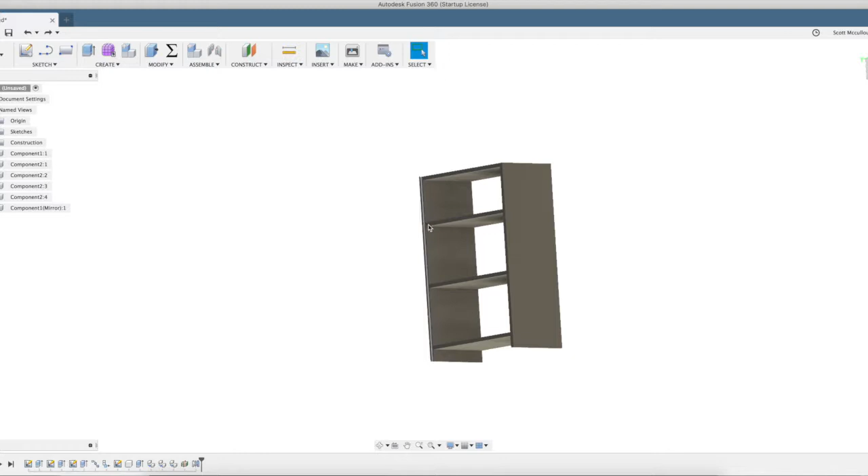Today we're going back to the bookshelf we worked on yesterday. We're going to clean up the shelf spacing that wasn't very good, start adding trim to the outside, put a face frame on it, some base molding, and probably add a top as well. So let's get into it.

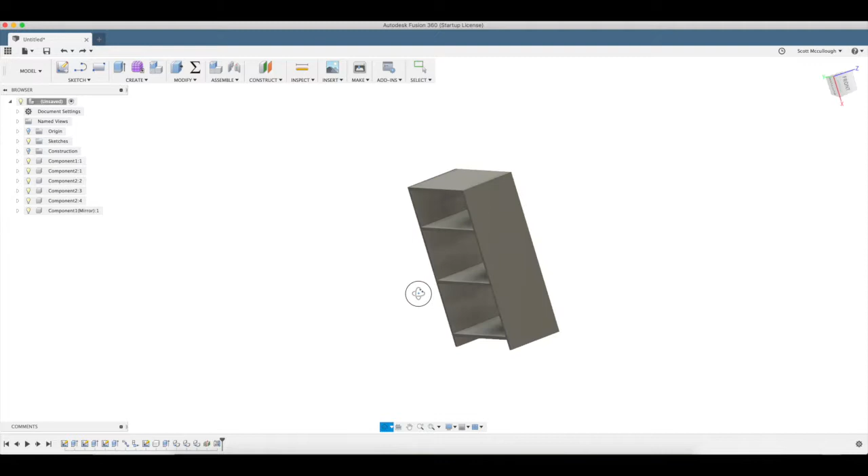Let's fix that mistake we saw yesterday with the spacing, and we could probably use an extra shelf in there. A quick feature I haven't discussed yet is the measure tool. Hit I, you can select that - see, it's black there. Come up to here and it gives us dimensions so we can see where we're at. Escape. So that's 11 1/4.

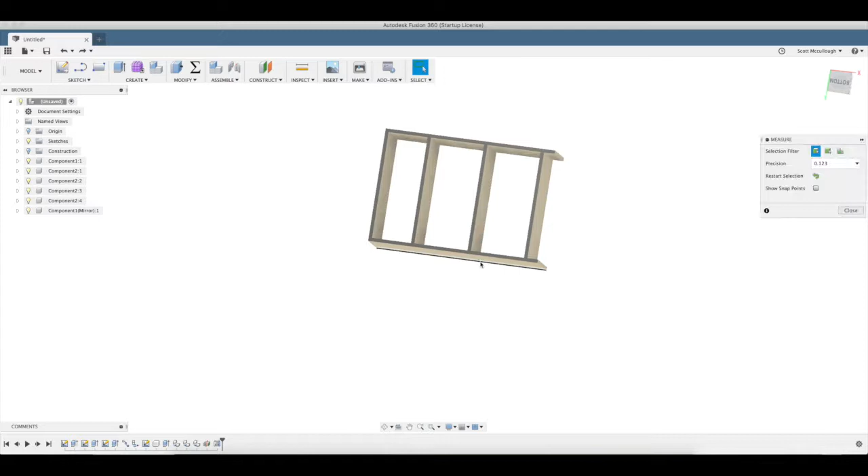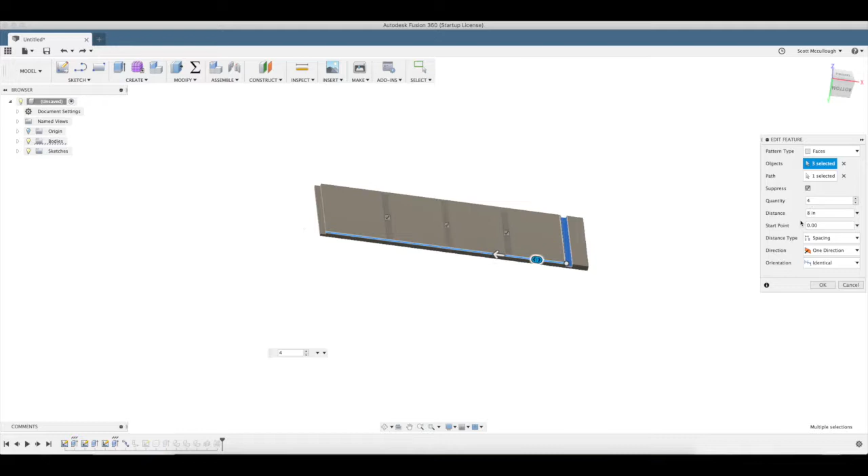Let's get where we can see it in view here. I think I want to add a whole other shelf to this, so let's make that 4. Change our spacing to probably about 8.5 - that looked about right from our math there. 8.5 inches, hit OK on that, and now you can see we've created an extra shelf, but our shelves are out of line.

We're going to fix that as well by using a new tool I haven't talked about either - the joint feature, up here in Assemble. Let's click on Joint. We want a rigid joint, and we want to select component 1.

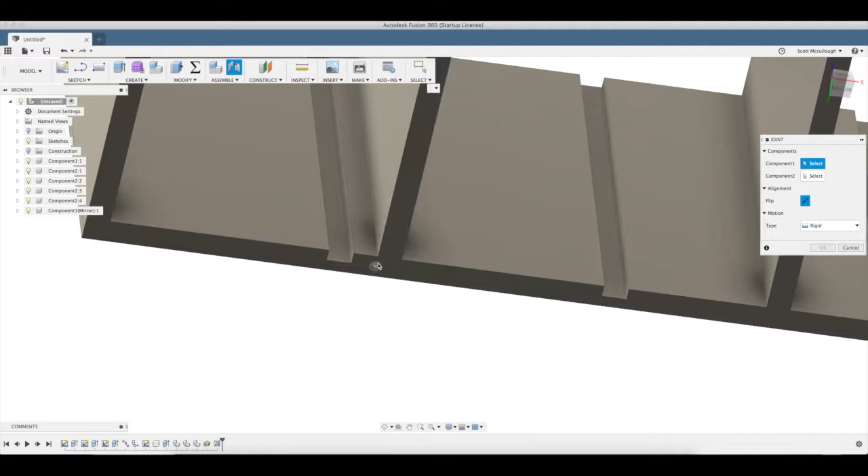This is kind of like the move tool we used yesterday. We want to get that corner there, come to that corner. We can see there's a little animation there, and when you see that shaking like that, it means it's locked in. So hit OK on that.

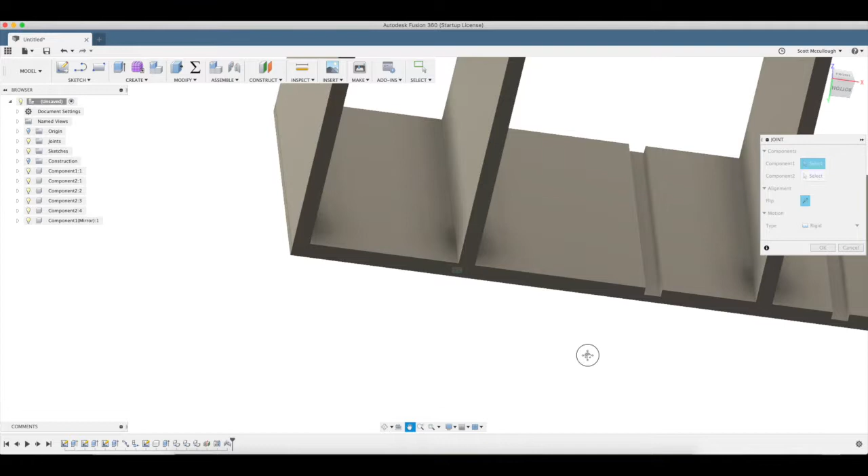Alright, I want to come back - not that, Assemble Joint. We can see there was a hotkey, J, to bring up joint. We'll use that on the next one here. Get that corner there, locked in.

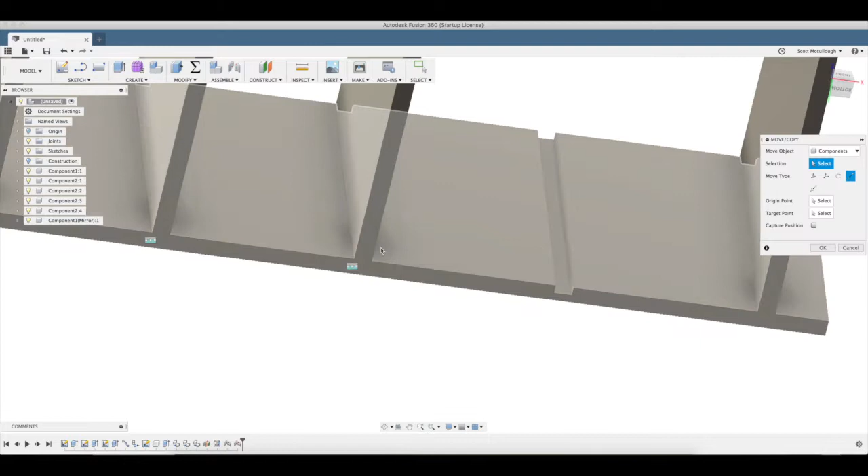Okay, now what we need to do is copy one of these to get back to the state from yesterday. So for selection, we're going to select this, our origin point, and I want point to point on the new selection here. So point to that point, and we want to create a copy. Okay, bring back up our J tool for our joint, rigid joint, component 1.

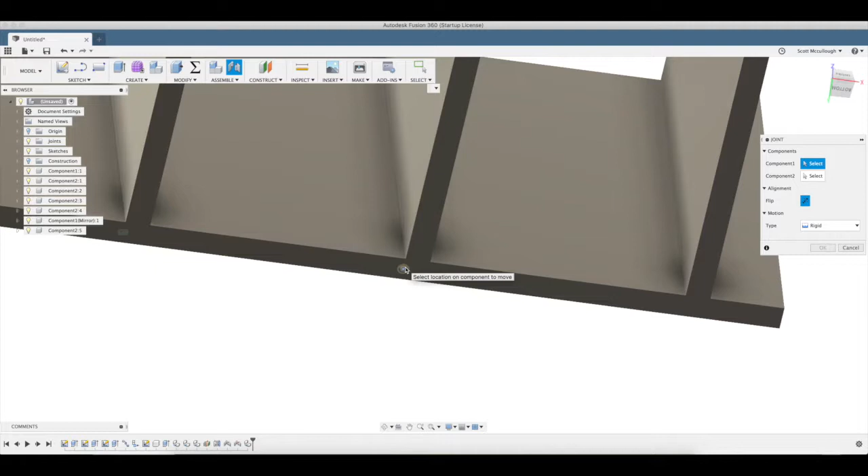I'm not sure how it's going to work since it's already got on top of it here. Yeah, see, that worked really well. So what we need to do is move that up and out of the way so we can get a better selection on it. We'll cancel that. M for move, free move. I just want to use the up arrow here to get that up out of the way.

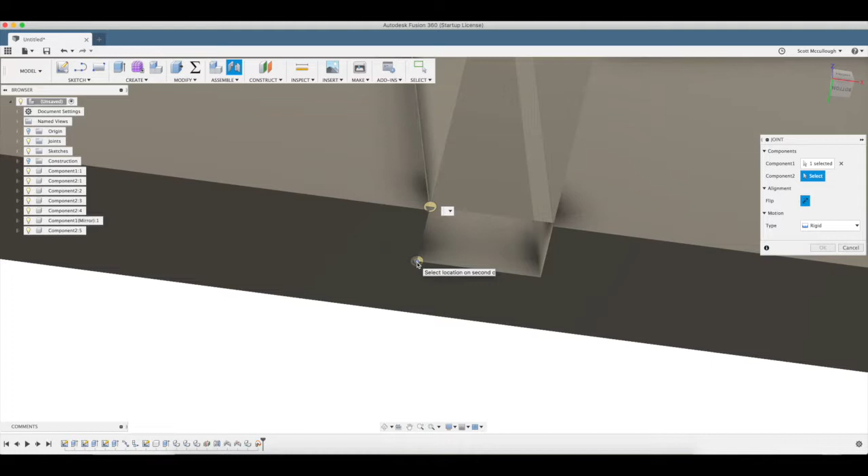Okay, J for joint, capture position. Select that point. One thing I noticed is that circle there is with the surface, so make it flip over inward, where this is in the same plane as the one above. Lock that in, okay on that. One more to do.

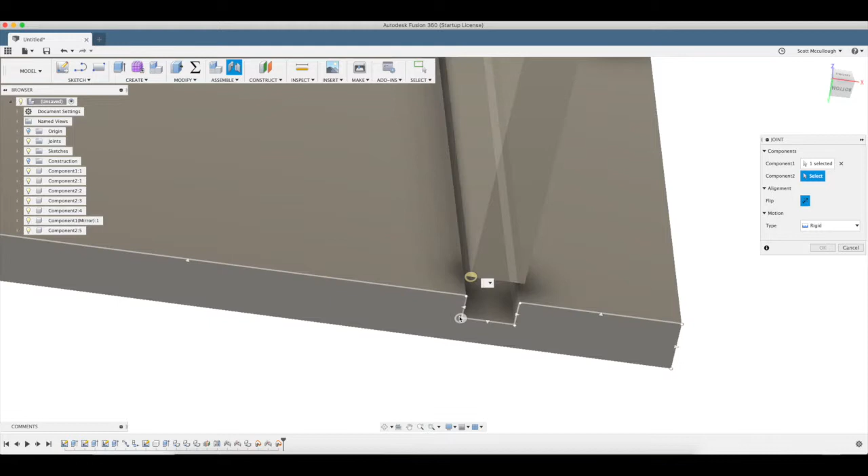These joints are very powerful in Fusion - I'm going to show you why here in a second. Do the same thing we did last time, get this up out of the way. We're still on free move, we can see over there in the selection window. Just get this up out of the way. Okay, J, capture position, select our point 1 here and second point. Locked in, okay. Yeah, I think I need to get the top as well, yes.

J for - M for move first, just move that out of the way. Enter, J tool, capture position. Alright, we're all locked in.

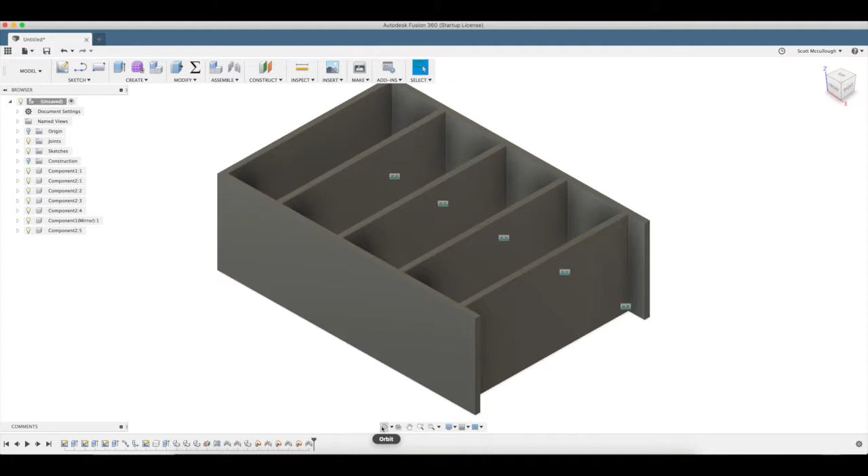So like I was saying, let's show you why that joint's really powerful now that we created it. What we can do now is, see, I hit the home button here. I think yesterday I just noticed we didn't really draw on the right view, which isn't a big deal. We can get this, put this as top, and then the down arrow, hit reset front.

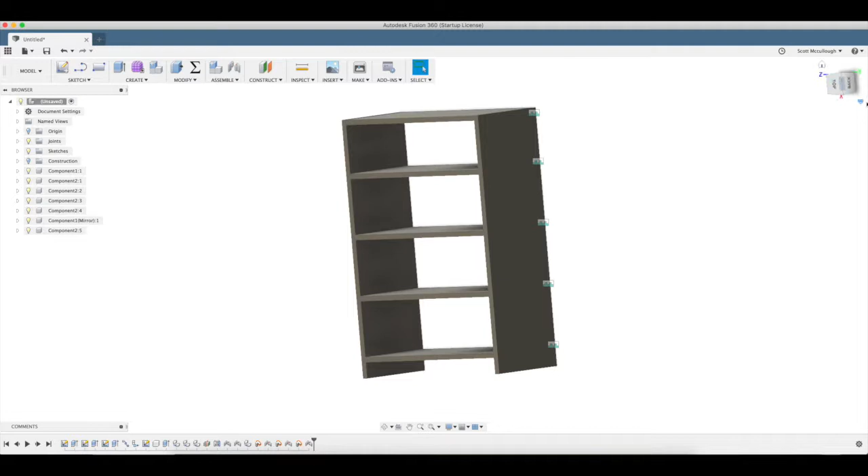So we want to create a new parameter, and we're going to call that one face frame width, and we're going to make it, I think, 1.5 inches - well, 2 inches. 2 inches.

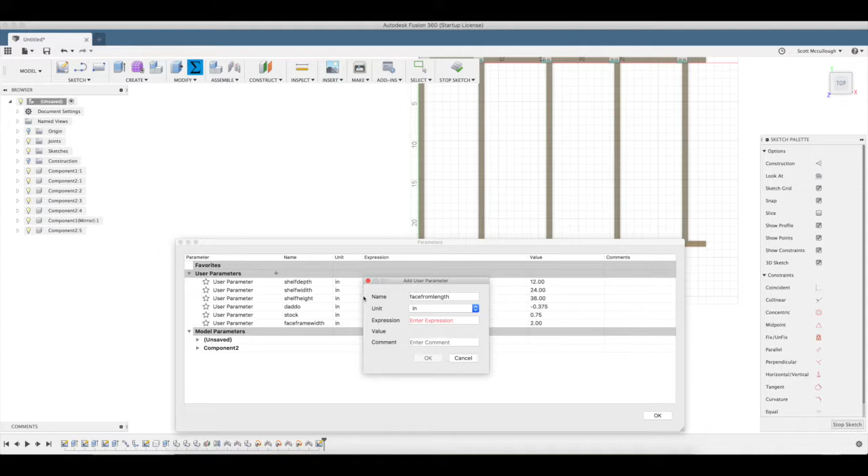And then we'll add one more parameter, face frame length. 33 inches.

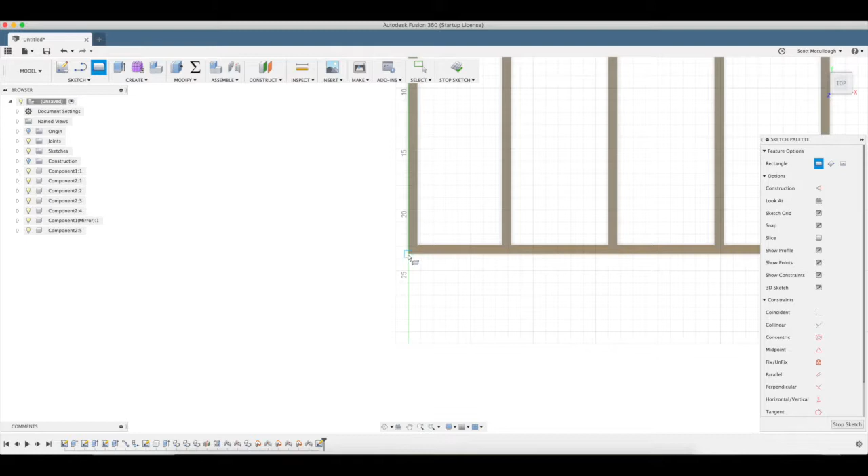Okay on that. Now we can still have our sketch up here, so we'll just draw a rectangle. Make sure I got that corner selected there first. So we'll say face frame width, and tab over, face frame length.

I think we're going to go ahead and change that from 2 inches to 1.5 inches - I think it might look a little better. Yeah, it looks a little better.

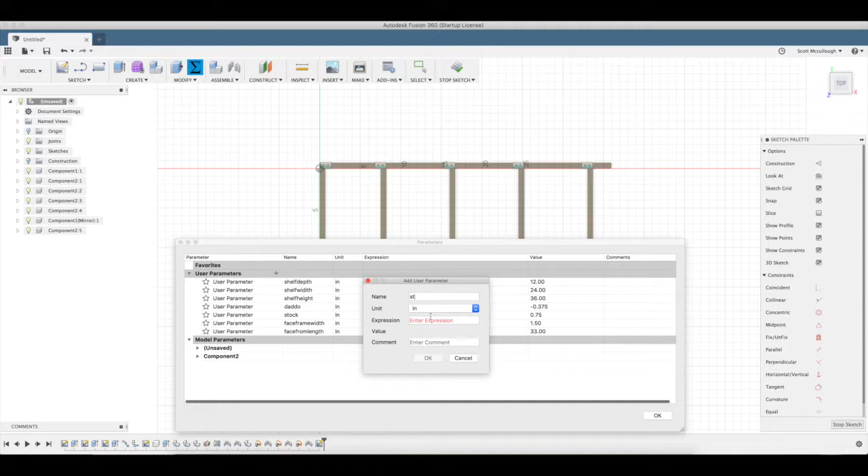Now I was going to keep the same parameter, the 3/4 stock we used yesterday, but there could be a reason why you might want different stock thicknesses, since these are kind of two different assemblies. So we're going to call this face stock - I know my naming isn't very clear or organized, but whatever works for you. We'll just say 0.75, because it doesn't matter as long as we use the right parameter.

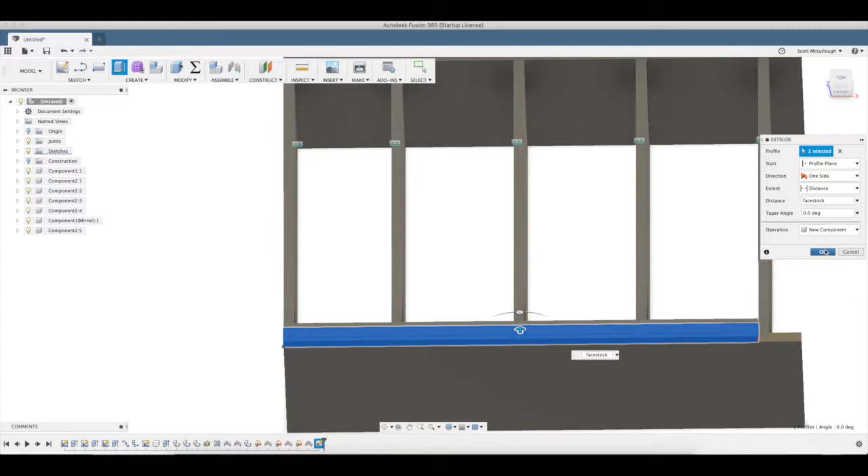So we're going to hit Q for press pull. Select these two different ones, face stock, new component. And there we have that.

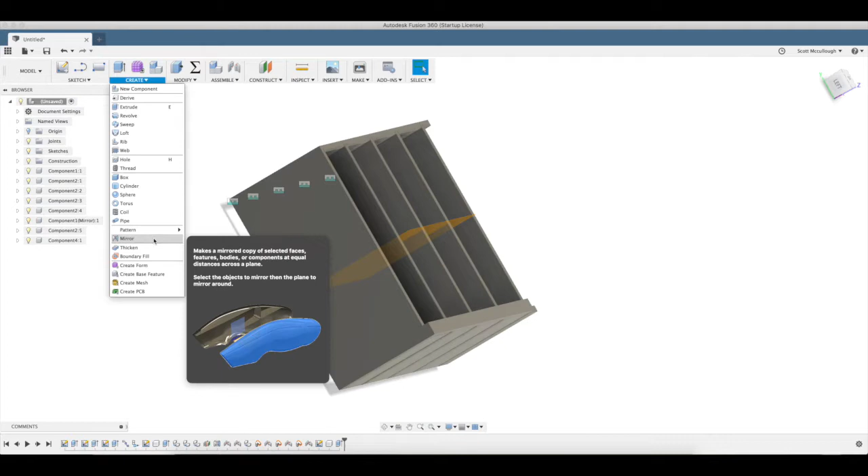Now what we can do is use that handy dandy mirror tool we used yesterday. I'll be able to use the same construction plane as yesterday, pretty sure—we'll see when we go to try to flip it. I had to remember what selections I used yesterday. Create mirror. Got component selected, object is this, our mirror plane is here. Yep, that worked just fine.

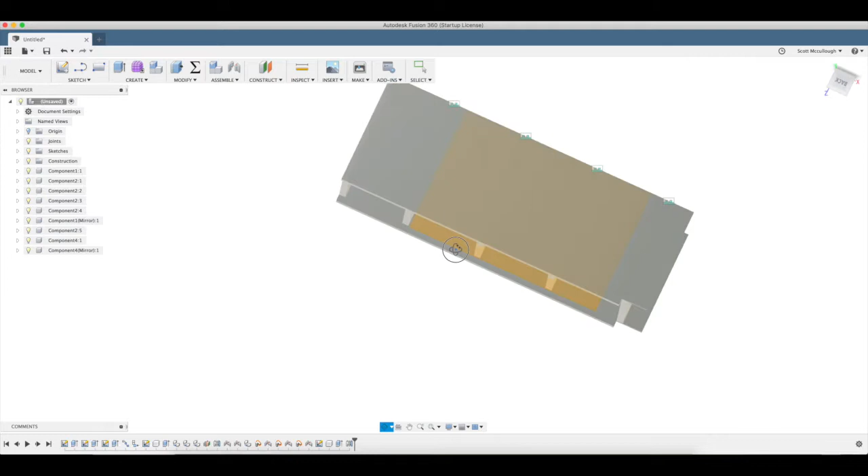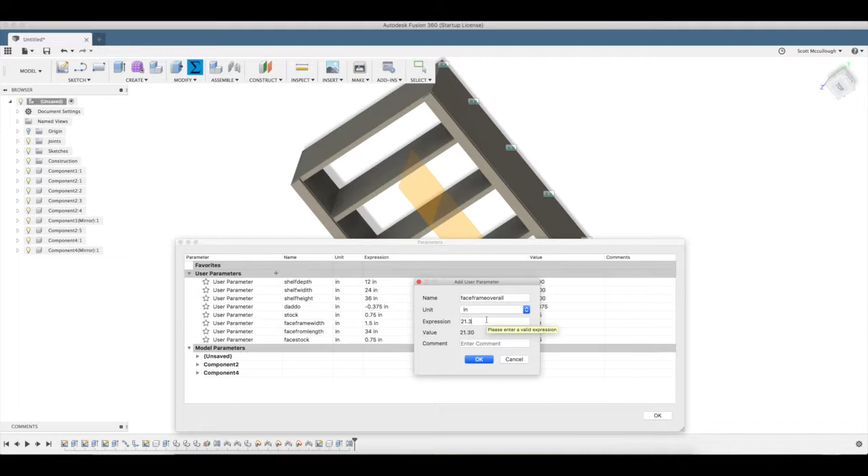So now let's add one more parameter: face frame overall. We'll say that was 21.375. Enter.

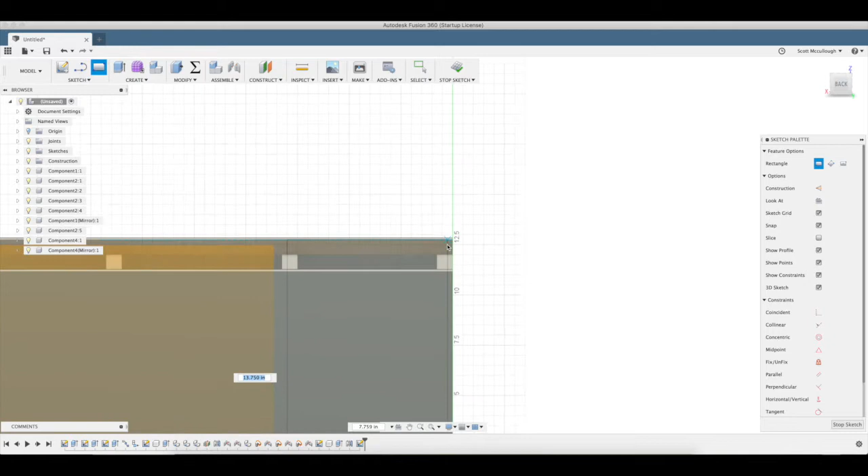We want to draw a sketch on that face. Kick that up so we can see what's going on in there. And we just want to select that corner. Where are you at?

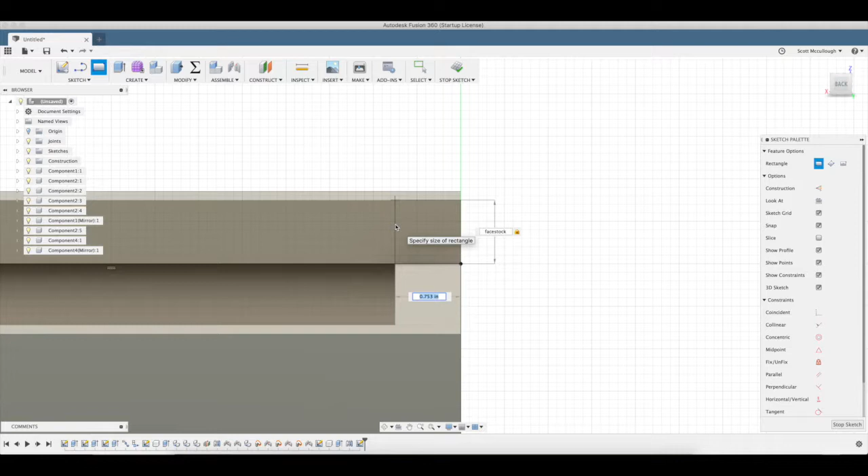Okay, so we want to say face frame, stock tab, face frame width. Enter.

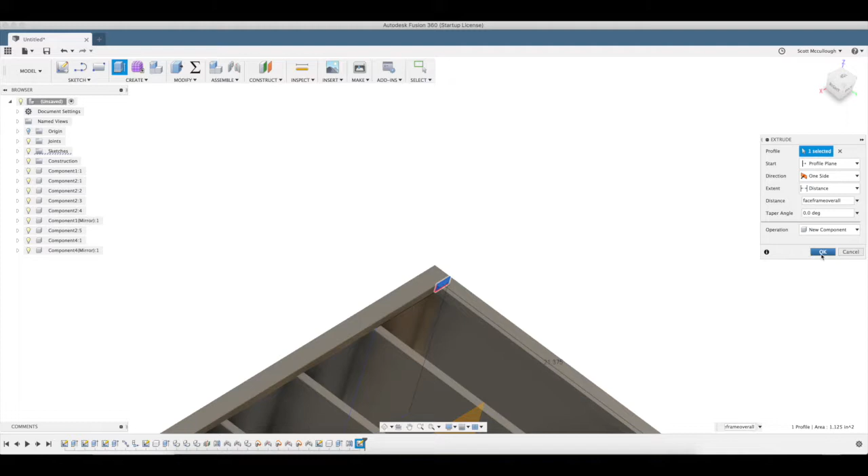Now we want to bring up our extrude tool. Select E on the keyboard. New component—well, we want to go face frame overall. Enter.

So now we need to make these, add more of these stiles here. I can't remember their stiles or rails.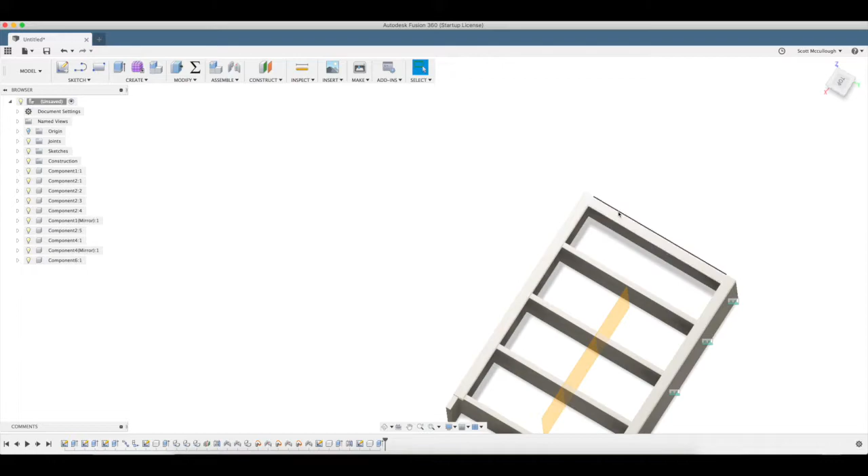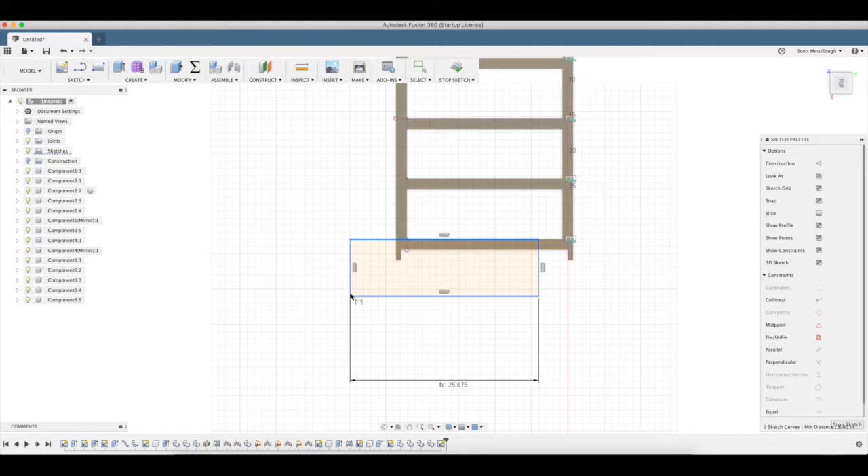Now we're ready to start creating the trim on the bottom. We're going to select here, spin that around. We're just going to draw a random rectangle like that, give it some dimensions—D for dimension, trim front length, D for dimension, trim width, enter, select our constraints over here, midpoint of that to that.

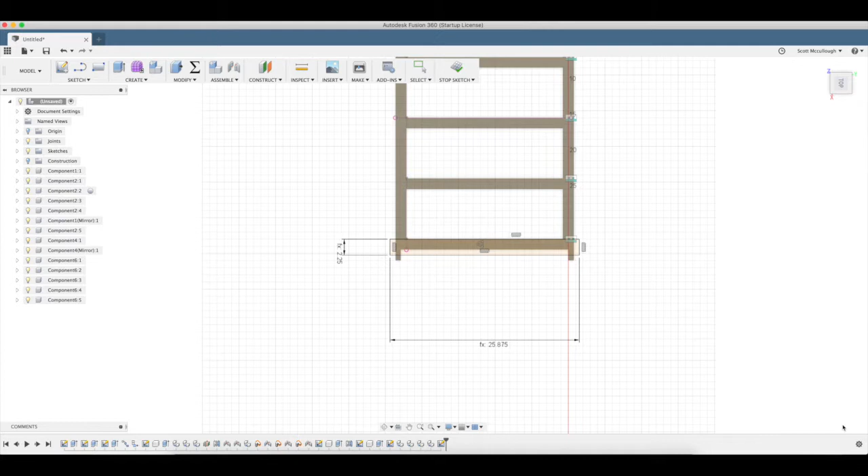Now we're at the midpoint, it's locked in there. But we want to move it down because it's on the top edge of that. So we can hit stop sketch, and hit press pull, Q.

New component—I'm going to let that make it go out. Stock. Pardon me. Enter.

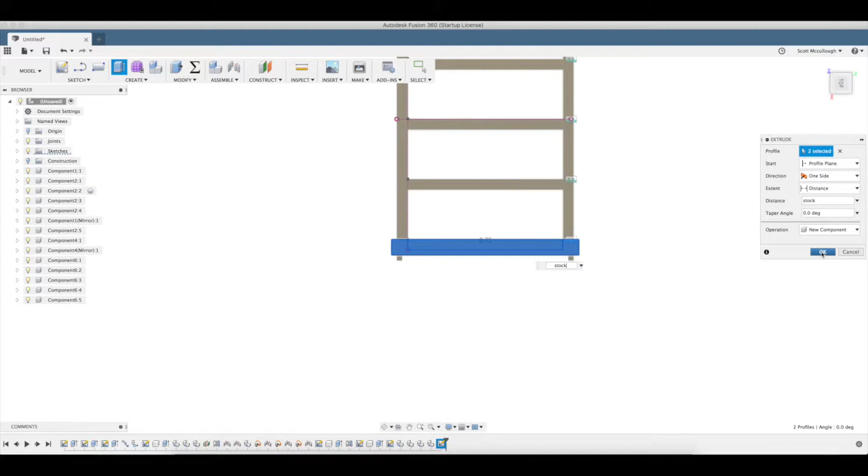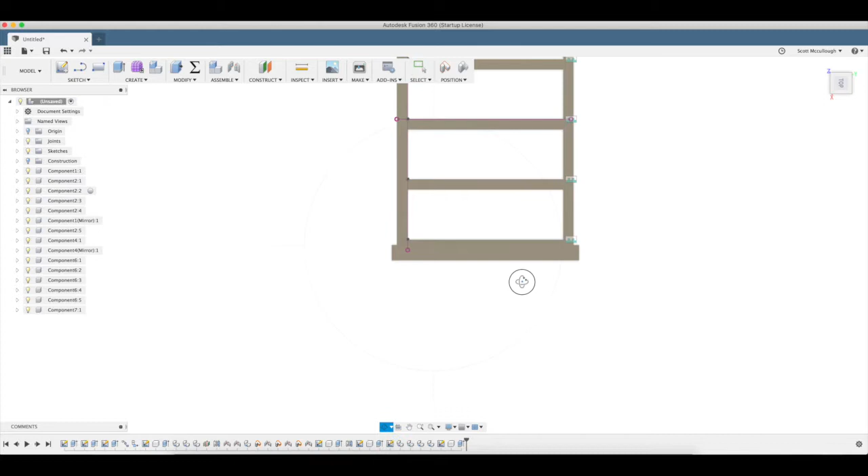Now we'll go ahead and move that down under translate. Down 0.75 inches. Make sure that looks right. Okay, that's in line down there.

We'll go ahead and draw our side trim now. Capture position. We'll draw a rectangle on this side. Figure out where that spun us around to. Alright.

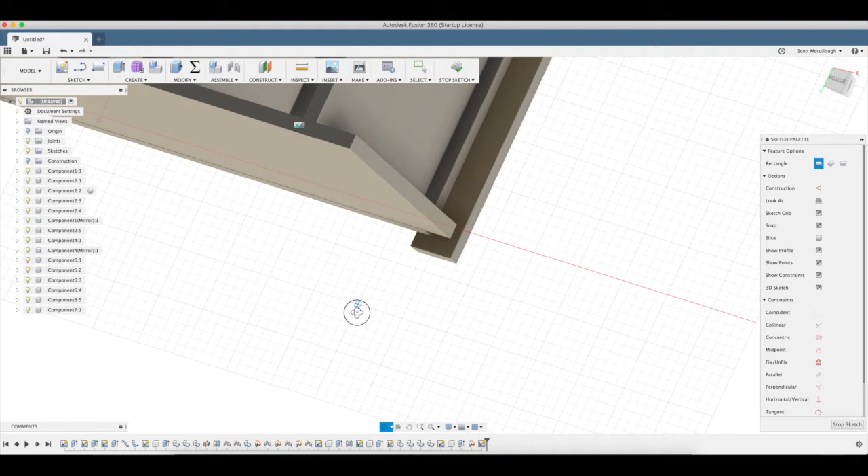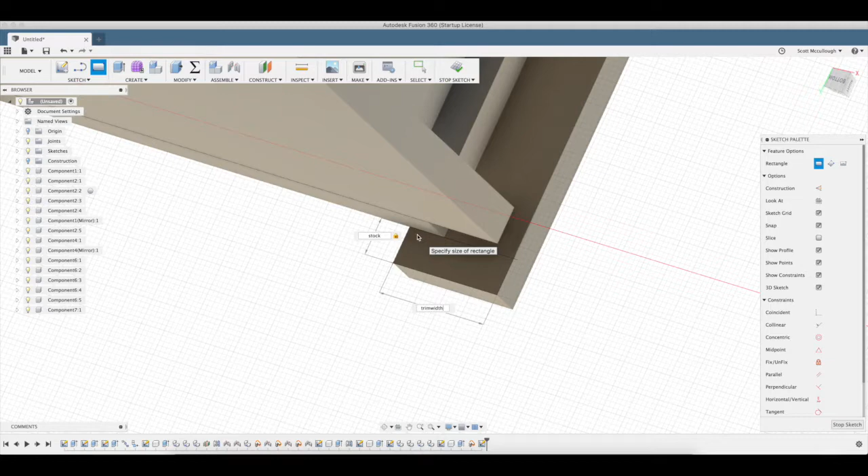So we want this to be trim—actually be stock, since we're going the other way. Enter, tab, trim, width. Enter. Now we're going to go ahead and press pull that out.

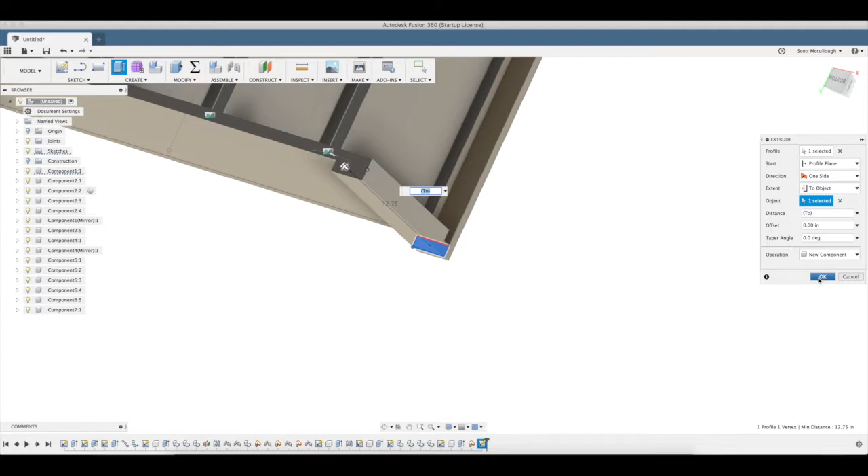Make that a new component. To object. And there we go. So there's our side trim.

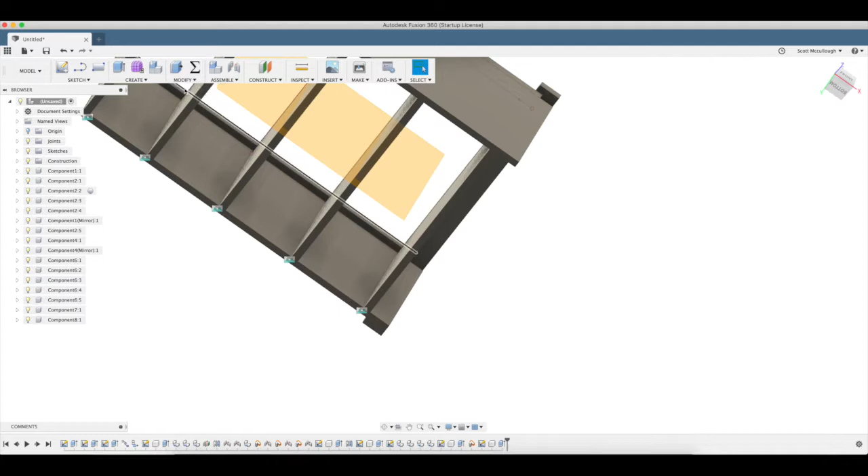Spin around to this side. Actually, let's go ahead and turn on our construction plane that we used yesterday in this, and we want to go ahead and pull up the mirror tool here. Mirror. Select that object, select the mirror plane. And there we go.

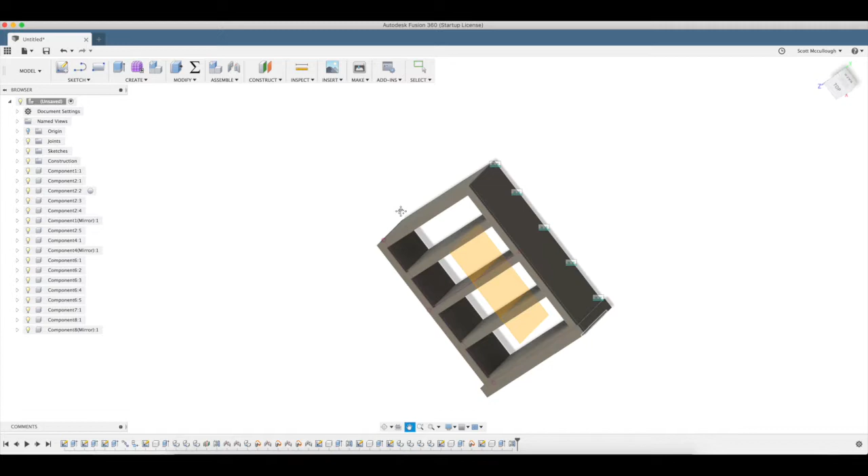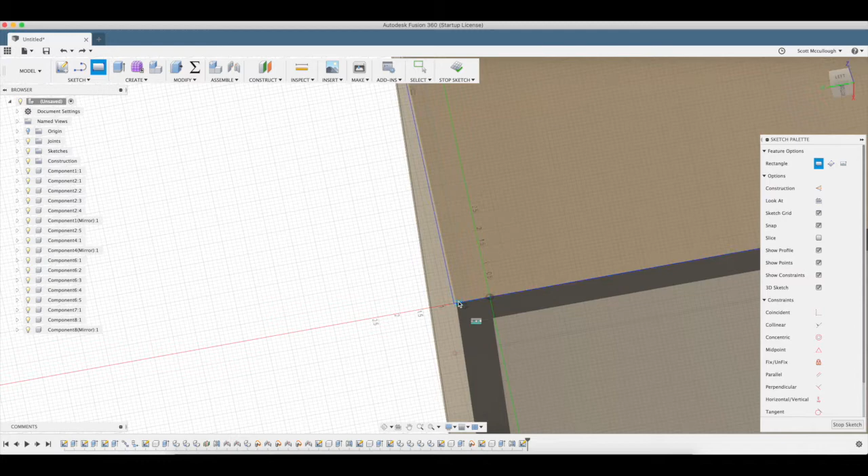Now let's go ahead and put a little bit of a top on here. We'll go ahead and draw a rectangle on here. O for offset, we're going to go out 1 inch.

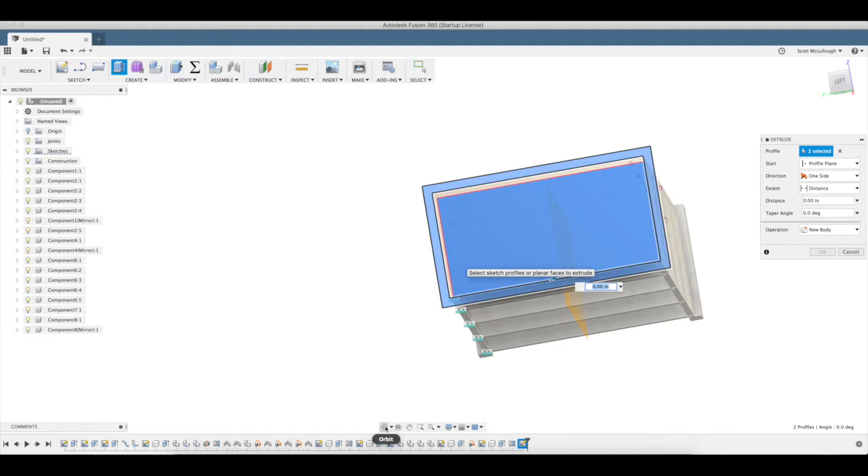E to extrude. New component—I want to go up stock on that. Enter.

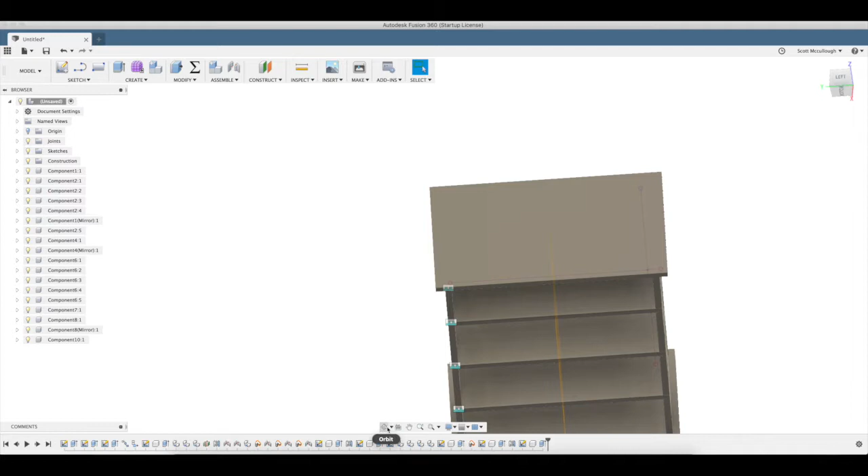Well, we can go ahead and turn off our joints, sketches, and construction plane.

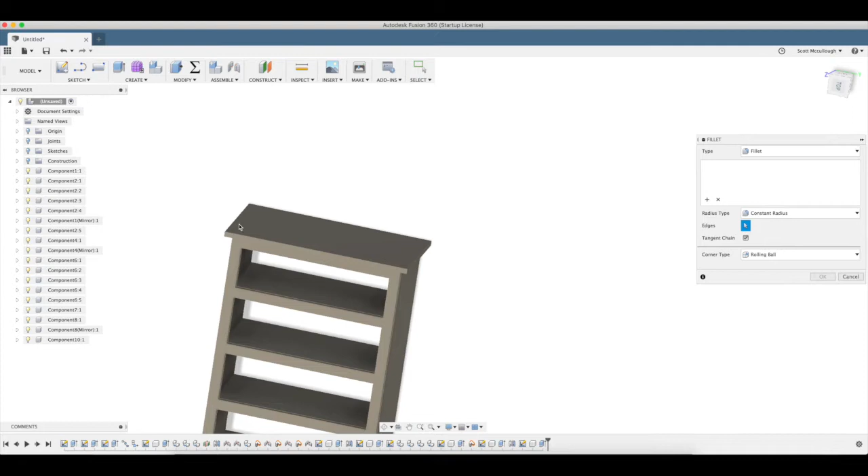Now what we can do is add some fillets—just say you ran over it with a round over. So I hit F for fillets. Let's select all these top edges here. We'll put a half inch on that.

And let's go ahead and roll down to the bottom and do the same on that. 0.5, like so.

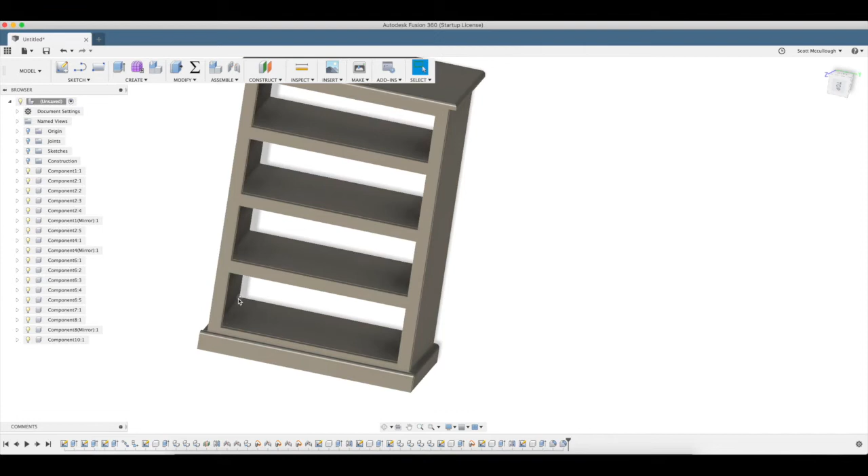Looking pretty good. Now let's go ahead and add some color to it. So I hit A for appearance there. We'll go down to solid wood. Maybe. There we go. Finished.

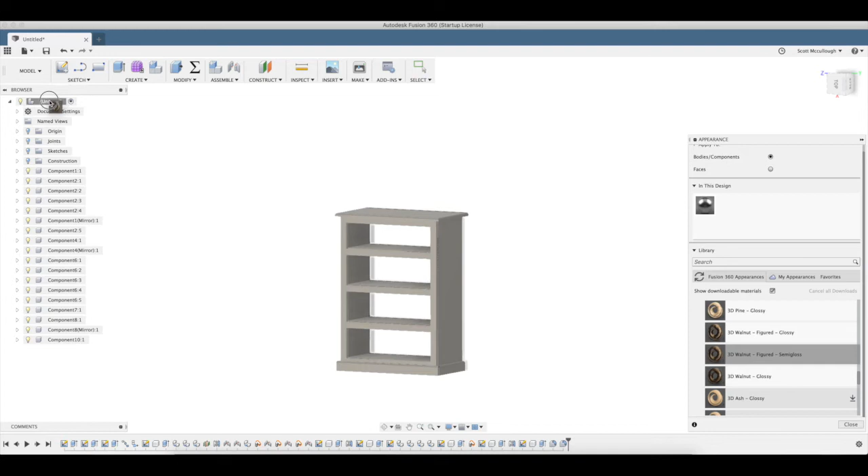So I'm clicking down on it. We're going to choose walnut—3D figured walnut semi-gloss. Click down and hold on it. I'm going to go to the top of our tree here, and this will apply it to all the components inside the project.

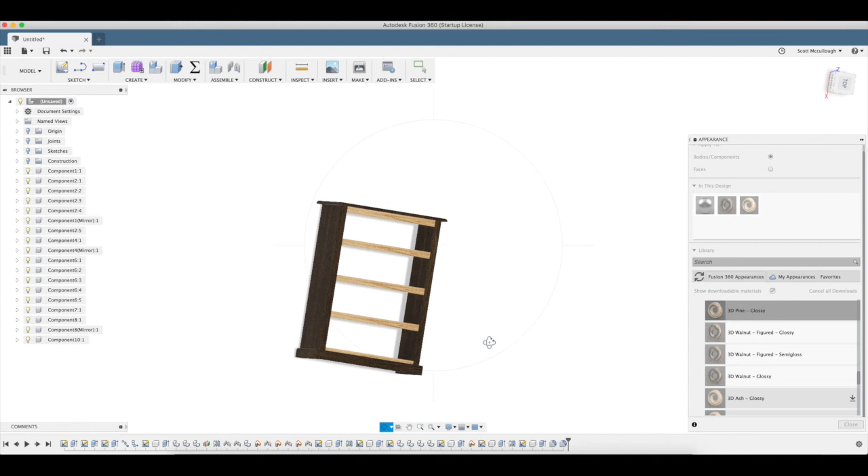And if there's one that you wanted different, you could segment it out by choosing whatever component you want on the sides. Like for option here, we can see we want it to have it on that one. Change all those so those are joined together. Looks kind of cool.

And that's pretty much the basics of making the bookshelf. You can get creative with it and do your own thing.

Building these projects is not only helping me get better at Fusion, but hopefully helping you get better too.